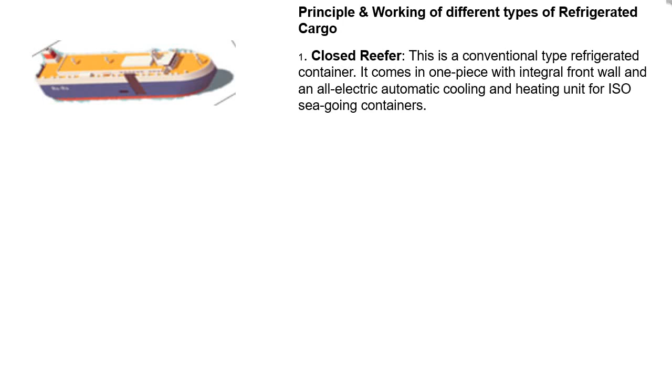Principle and working of different types of refrigerated cargo. 1. Closed reefer. This is a conventional type refrigerated container. It comes in one piece with integral front wall and an all-electric automatic cooling and heating unit for ISO sea-going containers.

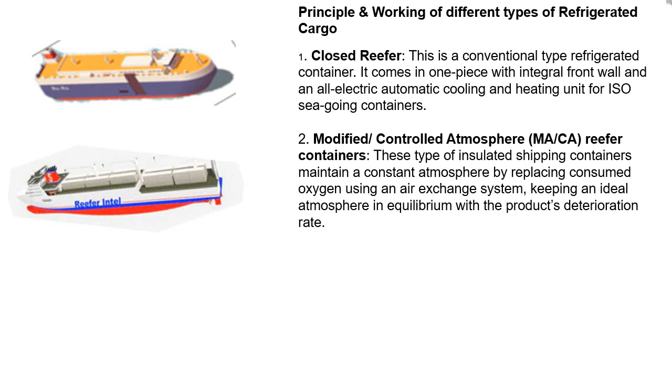2. Modified/controlled atmosphere, MA/CA, reefer containers. These types of insulated shipping containers maintain a constant atmosphere by replacing consumed oxygen using an air exchange system, keeping an ideal atmosphere in equilibrium with the product's deterioration rate.

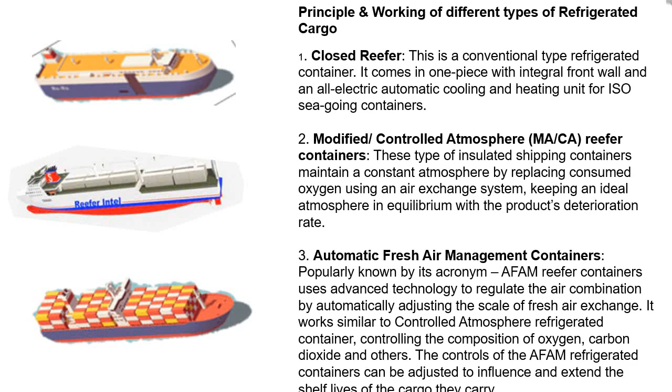3. Automatic fresh air management containers, popularly known by its acronym, AFAM. These reefer containers use advanced technology to regulate the air combination by automatically adjusting the scale of fresh air exchange. It works similar to a controlled atmosphere refrigerated container, controlling the composition of oxygen, carbon dioxide, and others. The controls of the AFAM refrigerated containers can be adjusted to influence and extend the shelf lives of the cargo they carry.

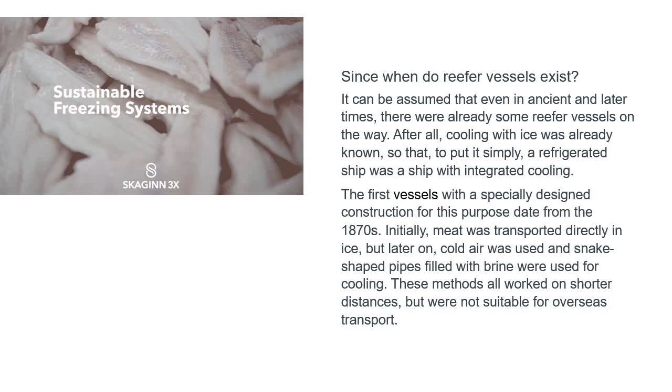Since when do reefer vessels exist? It can be assumed that even in ancient and later times, there were already some reefer vessels on the way. After all, cooling with ice was already known, so that, to put it simply, a refrigerated ship was a ship with integrated cooling. The first vessels with a specially designed construction for this purpose date from the 1870s.

Initially, meat was transported directly in ice, but later on, cold air was used and snake-shaped pipes filled with brine were used for cooling. These methods all worked on shorter distances, but were not suitable for overseas transport.

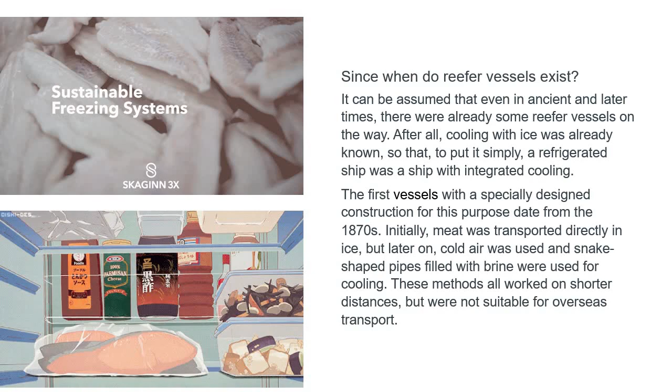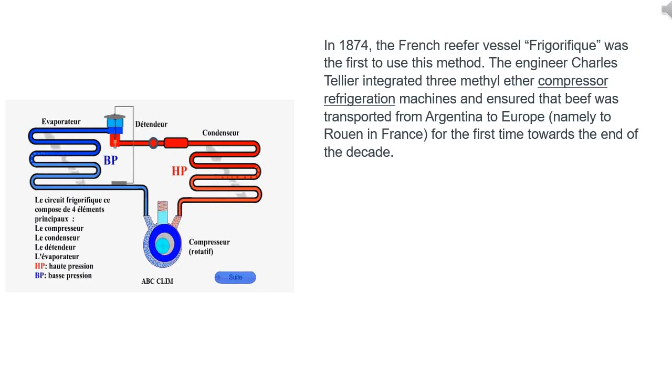In 1874, the French reefer vessel Frigorifique was the first to use this method. The engineer Charles Tellier integrated 3 methyl ether compressor refrigeration machines and ensured that beef was transported from Argentina to Europe, namely to Rouen in France, for the first time towards the end of the decade.

At the same time, absorption refrigeration systems on the steamer Paraguay were also successful, in this case on the route between Buenos Aires and Le Havre, and in 1879 the British vessel Strathleven sailed from Sydney in Australia to London with an air refrigeration machine and 40 tons of mutton. All these methods proved to be feasible, so that in the following years the transport of meat between South America and Europe or Australia and Europe by reefer ship flourished.

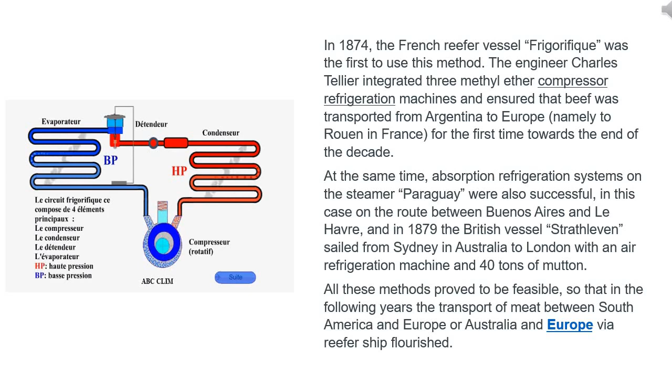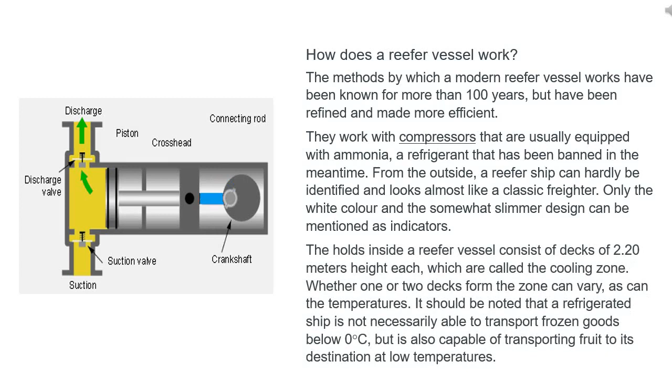From the outside, a reefer ship can hardly be identified and looks almost like a classic freighter. Only the white color and the somewhat slimmer design can be mentioned as indicators. The holds inside a reefer vessel consist of decks of 2.20 meters height each, which are called the cooling zone. Whether 1 or 2 decks form the zone can vary, as can the temperatures.

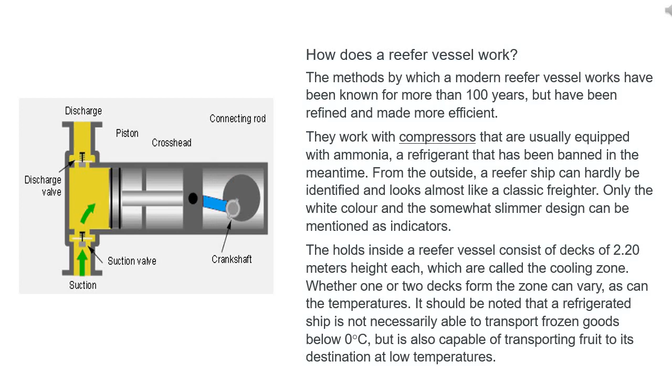It should be noted that a refrigerated ship is not necessarily able to transport frozen goods below 0 degrees Celsius, but is also capable of transporting fruit to its destination at low temperatures. This is made possible above all by insulation against high tropical outside temperatures and compression refrigeration systems. Inside there are numerous measuring points, thanks to which temperatures are constantly monitored.

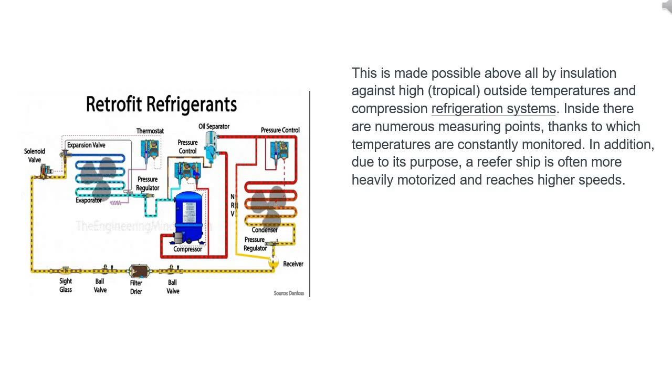In addition, due to its purpose, a reefer ship is often more heavily motorized and reaches higher speeds. Since the 1970s, refrigerated containers have also been used, in which the refrigeration technology inside the container is fully automatic. In the meantime, there were also porthole containers which had to be connected to the ship's cooling system, but this technology is no longer up to date.

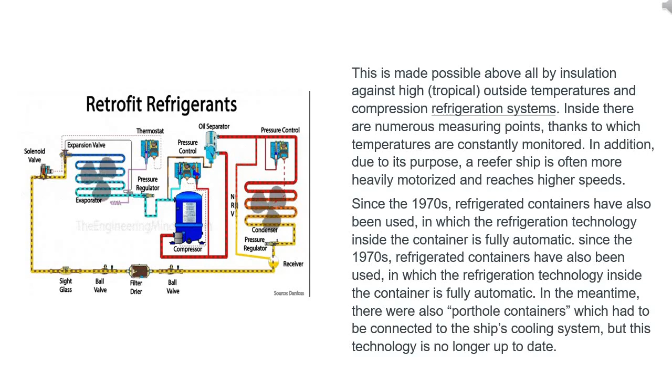The Reefer Vessel, History and Future. If one takes a look at the history of reefer vessels, it is by no means limited to the transport of meat since the 1870s. Rather, the transport of bananas and other fruits has received at least as much attention. Before the introduction of refrigerated ships and the corresponding techniques, the perishables were harvested unripe, ripened on the ship, and between 30 and 60% had to be disposed of at sea because they reached maturity too early.

At the beginning of the 20th century, banana freighters were still sailing without refrigeration and were characterized above all by speed. The first banana ships as reefer vessels were developed by the United Fruit Company in 1903. One year later, the first ships of this type were already in series production. Important for the early transport of bananas and ripening fruit was the removal of heat as well as CO2, ethylene and water from the hold to prevent post-ripening.

The future is more than uncertain for reefer vessels, as refrigeration now takes place in the containers. In other words, there is no longer any need for ships with their own refrigeration systems, as the entire technology can be accommodated decentrally without any problems. Already at the beginning of the 21st century, half of the reefer cargo to be transported was transported in containers specially designed for this purpose, with a strong upward trend.

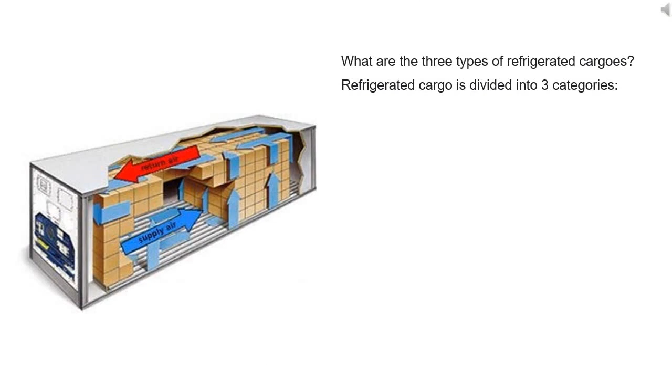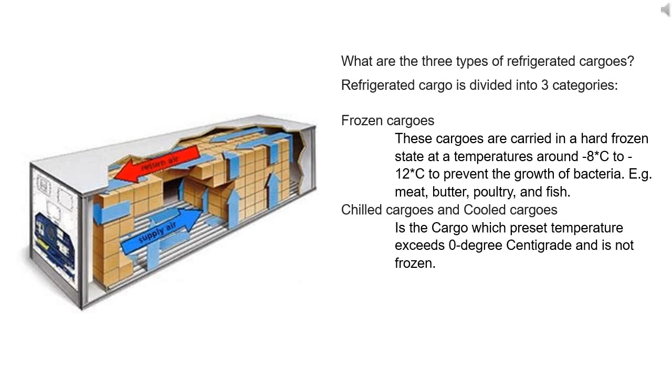What are the three types of refrigerated cargoes? Refrigerated cargo is divided into three categories. Frozen cargoes. These cargoes are carried in a hard frozen state at temperatures around -8°C to -12°C to prevent the growth of bacteria, e.g. meat, butter, poultry, and fish. Chilled cargoes and cooled cargoes is the cargo whose preset temperature exceeds 0 degrees centigrade and is not frozen.

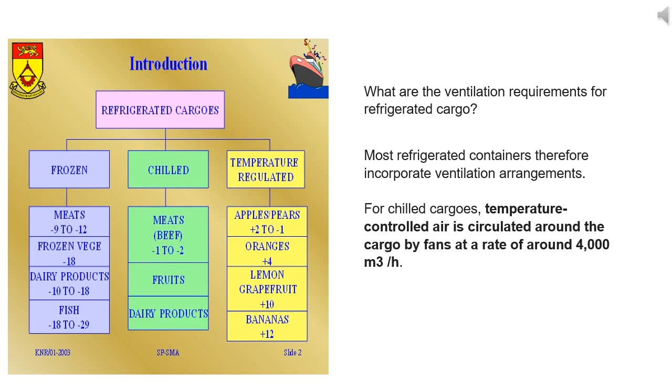What are the ventilation requirements for refrigerated cargo? Most refrigerated containers therefore incorporate ventilation arrangements. For chilled cargoes, temperature-controlled air is circulated around the cargo by fans at a rate of around 4,000 cubic meters/h. Fresh air requirements vary in the range from 25 to 250 cubic meters/h and are typically in the range 25 to 75 cubic meters/h.

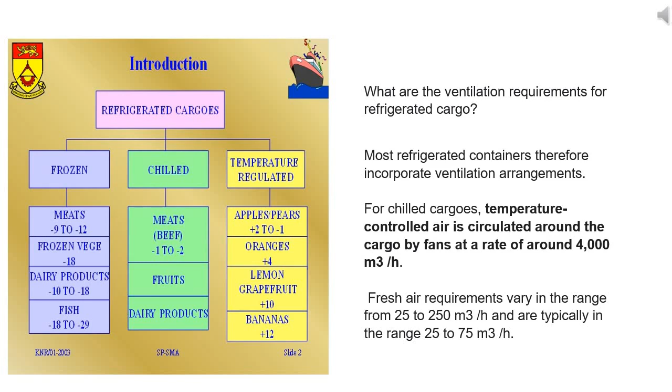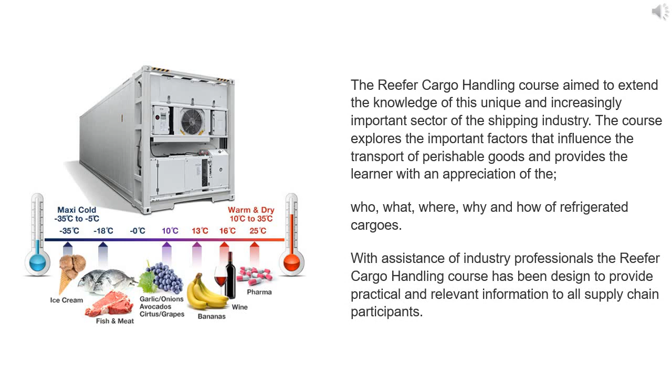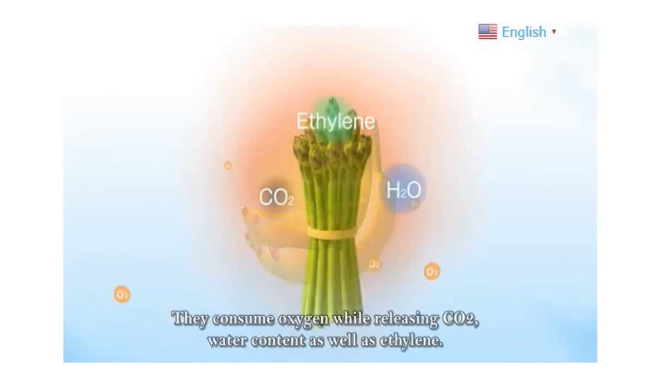As the world's middle-income population increases, so too does the demand for diverse produce from overseas. Cross-border trade is expanding, as more people can afford to satisfy their desire for produce from overseas. Perishables like fruit and vegetables continue to breathe after harvest. They consume oxygen while releasing CO2, water content, as well as ethylene. Without a carefully controlled environment, it's not possible to ship them over long distances, as they would spoil by the time they reach their destination.